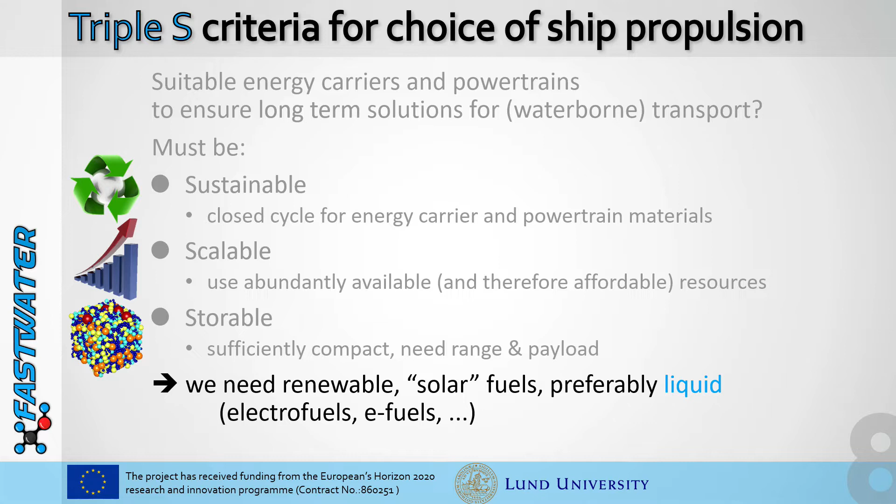If you combine these things and look at what we set out to do within the FASTWATER project, basically we see we have to go for renewable energy in the long run. Green electricity is what we will power a lot of things with. This is sustainable, this is scalable. It's a huge challenge to scale up renewable energy, but we know we have enough of it, so that's a comfort. Then we look at how we can actually make that green electricity manageable.

How can we power heavy transportation with this? We need to look for things with which we can store that power. So we're looking at producing green hydrogen, and capturing CO2, carbon dioxide. These are things that are abundantly available, so that answers the scalability issue.

Once we start building things from these scalable resources, we need to build smart things, and we think that methanol is a very smart choice. It's the simplest hydrogen carrier that is liquid at atmospheric conditions, so that makes it storable. Having a liquid means the number of applications you can tackle with this is much wider.

On the use of methanol, obviously CO2 will be liberated again, but if you start from captured CO2, you set this up in a closed cycle, so you don't emit any net CO2. You don't contribute to any CO2 rise in the atmosphere.

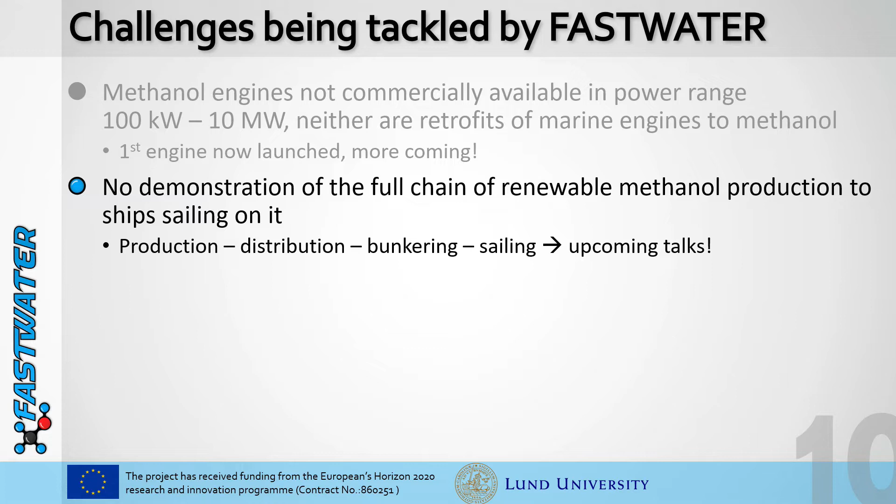A second big challenge was, okay, we need to move away from fossil fuels. Once you start looking into different fuels, it's a whole value chain that you have to start changing, from producing renewable fuel up to actually sailing on this renewable fuel. That's a daunting prospect. We needed to have demonstrators out there. We have managed to do that.

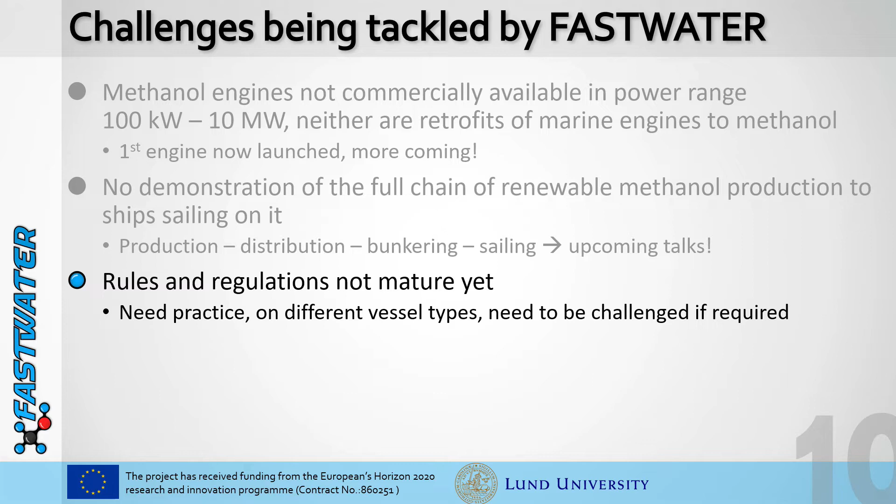Stay tuned for the following talks going into each part of this value chain. Also important, of course, very frequently a hindrance to introducing new things is rules and regulations. There were embryonic rules and regulations a couple of years ago. It was possible to do this, but again, we lacked experience with them. We lacked demonstration on different vessel types to really get this into our fingers - what works, what doesn't work, how should we tackle this?

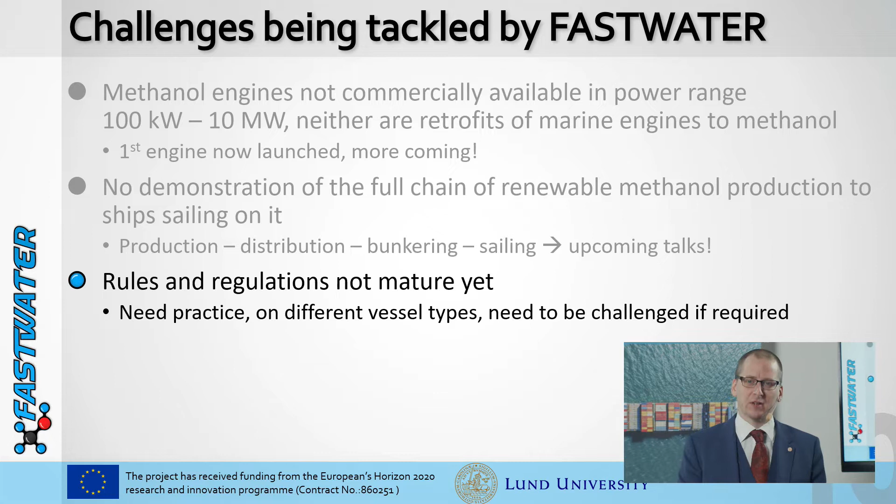So recognizing these challenges led us to submitting this project proposal to the European Commission and then getting it funded. We started about 18 months ago, June 1st, 2020, with a 4-year project with 14 partners that I'll show in a minute.

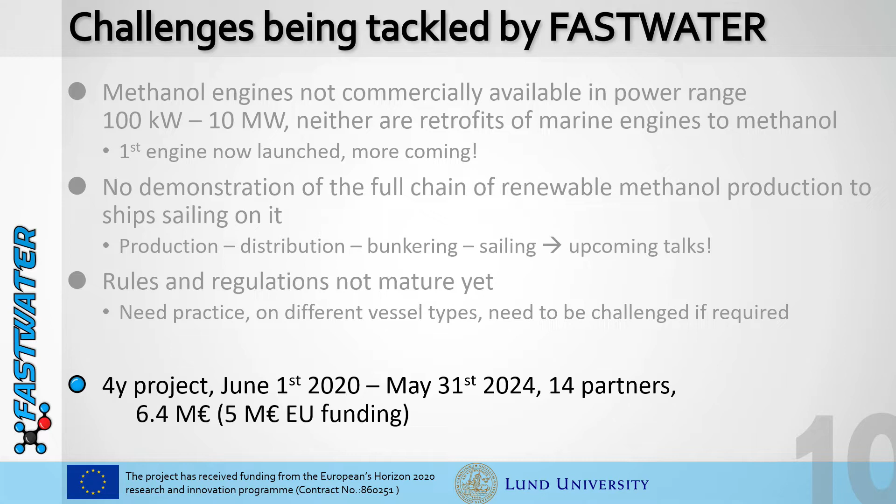What we are doing on a daily basis now is working on engines, working on different methanol engine technologies, working on different power ranges to really make these commercially available. So we have the first product out there already and more coming soon.

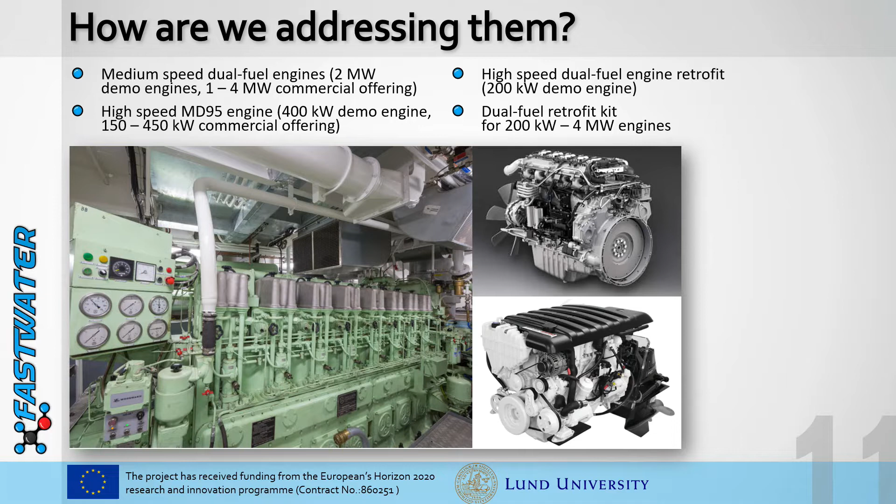But ultimately, these engines, of course, they need to end up in vessels. So within this project, the one you are going to hear about today is the launch of the pilot boat. You're going to look under the hood in a couple of minutes. So that's our first demonstrator ahead of schedule. I'm very happy to report.

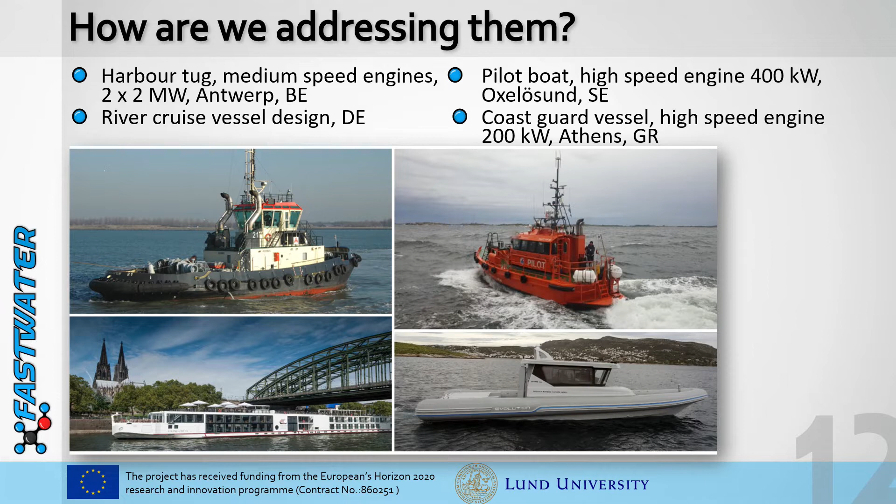So that's a number of partners, of course. Quite a number of pieces of the puzzle have to start lining up to make this happen. So we're spanning quite a number of different partners, from fuel suppliers, ultimately, of course, to vessel owners, such as the Swedish Maritime Administration. Even that is not enough, so we're very happy to have these partners on board.

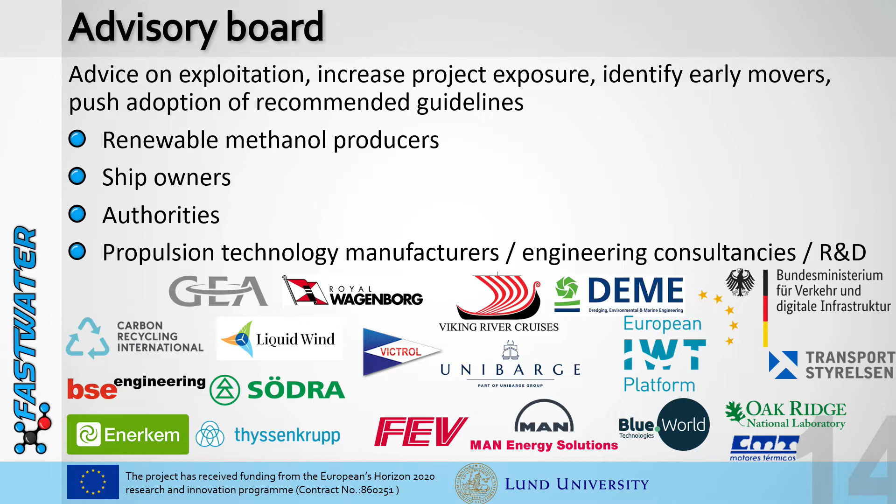But we're equally happy to also have quite a number of partners on board in our advisory boards that help us with advice on how to really make this a reality, how to exploit this, where to identify early movers, to help us out with these guidelines, to tweak them so that this all becomes feasible.

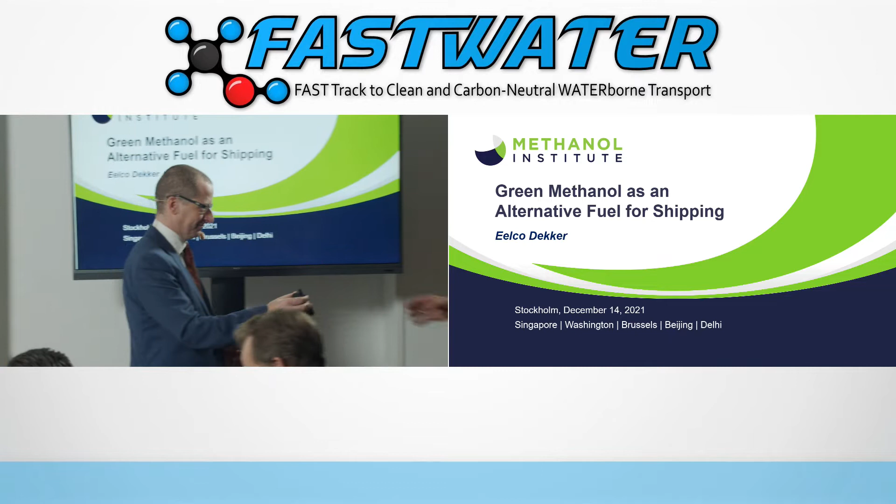On the off chance that you may not have heard of the Methanol Institute, it is a global industry association. We represent the world's largest methanol producers, methanol distributors, technology providers, and increasingly also methanol consumers, especially on the shipping side. Companies like MSC, Oldendorff and Maersk are all members that have joined the Methanol Institute over the last year.

Speaking of use of methanol as a shipping fuel, you only have to open up a shipping magazine or read a maritime website and you see all sorts of articles and headlines about promises of climate neutral, sustainable alternative fuels. What sets apart the different headlines, whether it's the announcement from Maersk of the 8 container vessels or X-Press Feeders with their 16 feeders, the 24 million euro subsidy that the Dutch government has provided for a methanol project with companies like Fugro, Van Oord, Boskalis and many others, is that methanol is not 5 years out. Methanol is happening today. We have approximately 55 methanol-powered vessels on the water today or on order.

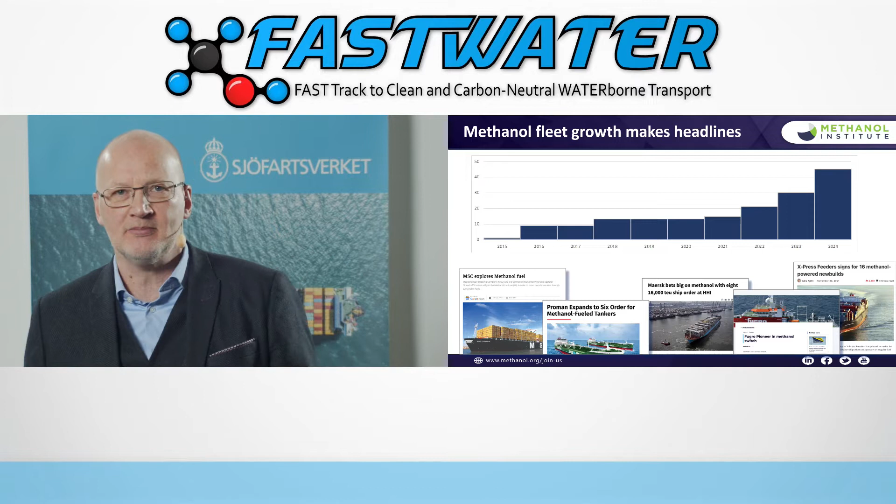There are more vessels on order as we speak, and it's only a limited amount of time before we will see the first 4-stroke engine, and really almost all major engine manufacturers are working on their methanol solutions. But the question is why are people looking at methanol as an alternative fuel? We had 2 speakers from the Swedish Parliament here today.

Policy is an important driver behind what's happening in the shipping industry. And we tend to forget that actually the first driver for the shift to methanol as an alternative fuel was not CO2. It was the introduction of the sulfur emission control areas by IMO. So in 2015, Stena Line introduced the Stena Germanica that operates on methanol in the form of a retrofit.

Since then, CO2 has become much more of a topic in shipping. On the international stage, we have the IMO that is trying to drive the international shipping industry to lower carbon emissions, starting with 40% by 2030 to 50% reduction by 2050.

But you can imagine that if you try and do this on the global stage, it's quite challenging, because where Western member states, Western countries and Western stakeholders feel that IMO is not moving fast enough, we have other parts of the world that are saying, well, hang on, we're going too fast. They can't even agree on the definition of what it means to reduce carbon. Are we talking about tank to wake, or are we talking well to wake?

So it's still a very complicated discussion. And so despite all the optimism at COP26, I'm afraid that it will still take IMO quite a long time to come to an agreement.

And then on the other side, we have the European Union. The European Union introduced the Fit for 55 package in June this year, which has implications for a lot of different industries, for a lot of different energy carriers. And in that package, there are two specific pieces of legislation that have a very big impact on the shipping industry. On the one hand, Europe aims to introduce the emission trading scheme for shipping as well, meaning that gradually, as a shipping company, you have to start paying when you're emitting carbon.

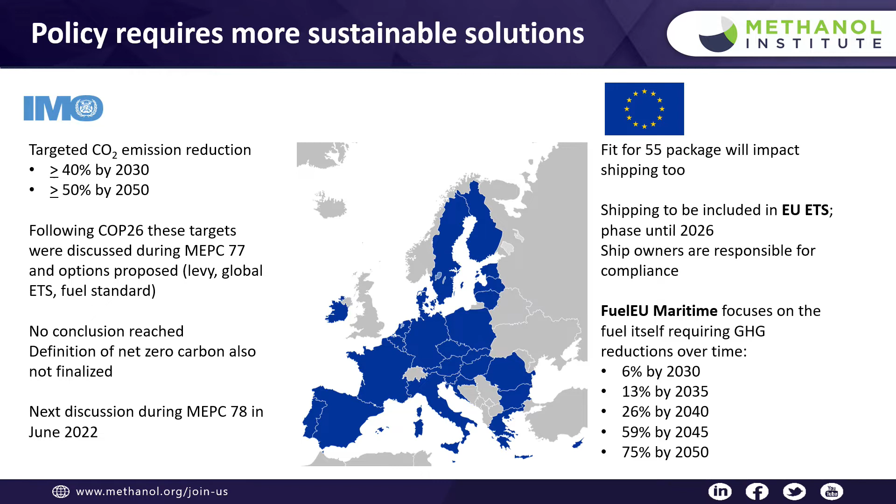And at the same time, Europe also has introduced the FuelEU Maritime regulation, which is looking at the fuel standard. And similar to what the Fuel Quality Directive did for road fuels, the FuelEU Maritime regulation is looking to reduce the actual carbon footprint of marine fuels.

So where does methanol come into that picture? Now, as I briefly touched upon, methanol, whether it's fossil methanol or renewable methanol, has an immediate benefit when it comes to reducing local air emissions. It can also drive CO2 emissions down, especially when you start producing renewable methanol.

And the question we get asked often is, how much renewable methanol is available? When will it be available? And in order to answer that question, we first need to look at how we actually produce renewable methanol. I'm not an engineer, I'm not a chemist, so I've definitely oversimplified things here. But really you can bracket the production of renewable methanol into 4 different buckets.

Today, most of the methanol produced worldwide is made from natural gas. If I switch over from natural gas to biogas, I don't actually have to change anything to my methanol production process, but I can start producing biomethanol. Another way of producing biomethanol is by gasification of either biomass or municipal solid waste, which gives you a syngas, which is then easily reacted into methanol.

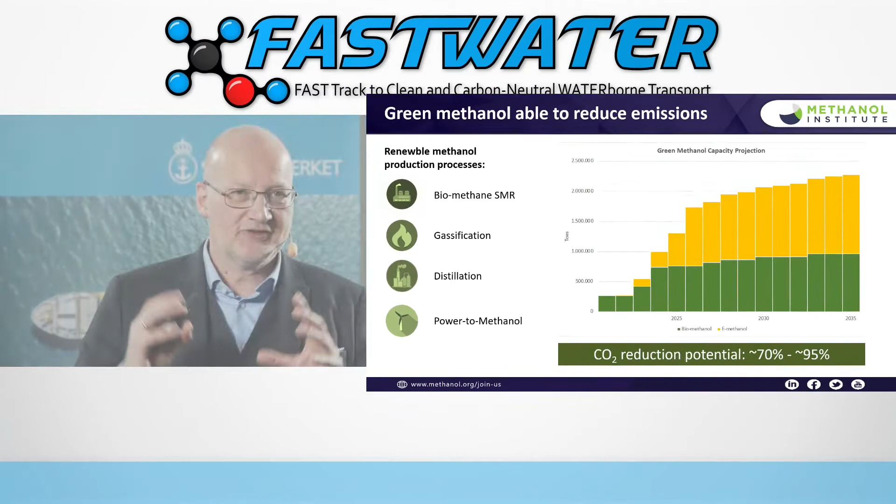Now, the next speaker after me is from Södra, and he will talk in much more detail about the specific process, which I have simplified by calling it distillation. I know that's not completely doing it justice, but we'll hear more about that.

And then the last pathway that was also briefly touched upon by Sebastian Verhelst is the production of so-called e-methanol, or in legislative terms it's called renewable fuels of non-biological origin, which means as much that we take renewable electricity, convert the electricity into hydrogen, and then react the hydrogen with carbon dioxide to produce methanol.

And in the chart that I'm showing on the slides here, I have tried to summarize what we have seen in terms of various announcements of different projects. And roughly we see projects equating to an order of magnitude of about 2 million metric tons of renewable methanol in the next 10 years or so.

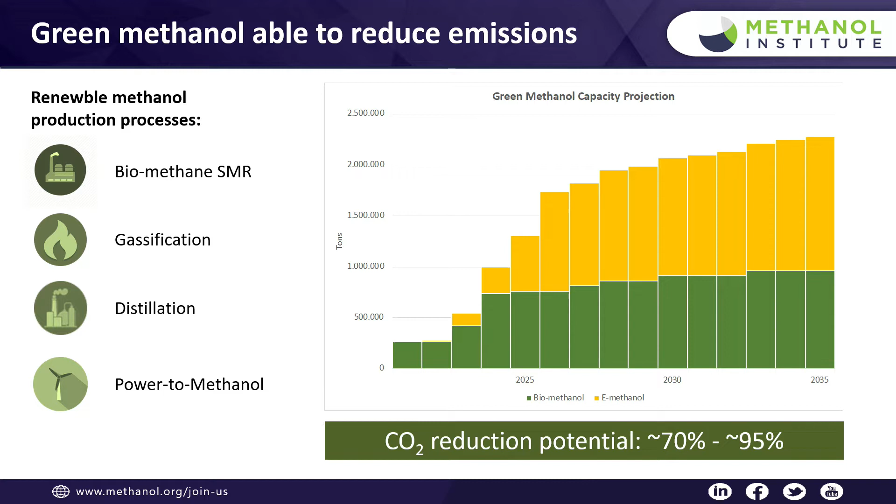Probably some of those projects will not come to fruition, but then again, every other week there's an announcement about a new project. So we're quite optimistic about where this will be headed. But the future will only tell, and it's really a question between supply and demand.

It's chicken and the egg discussion as usual.

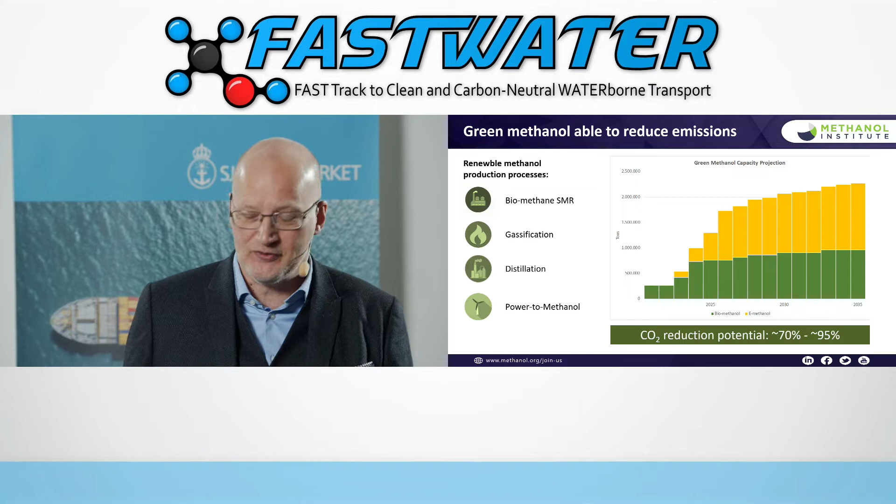So to summarize, why methanol? Methanol is liquid at atmospheric pressure, and it's available in most major ports around the world.

It results in immediate lower emissions, so better local air quality, but it also has the potential to reduce carbon dioxide. And something that is often neglected in these discussions: methanol is biodegradable. So you shouldn't have a spill, but when you do, methanol actually causes very few problems.

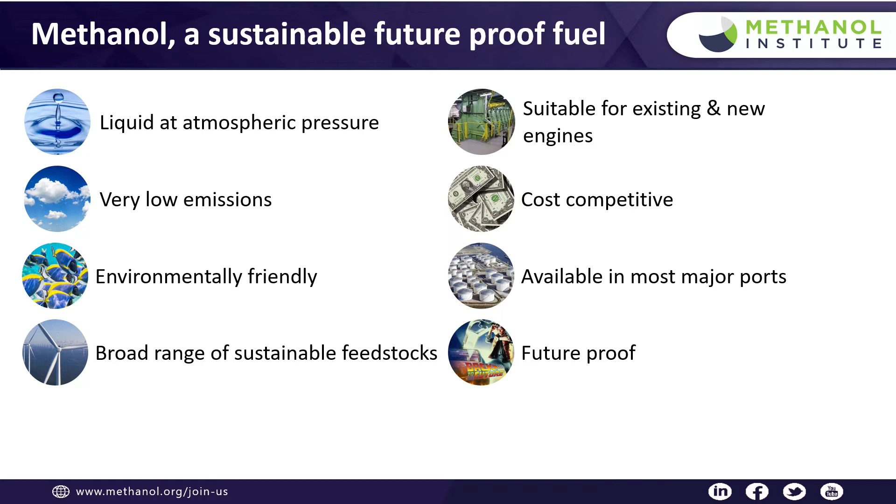Methanol can also be made from a wide range of renewable feedstocks. It can be cost effective, and when you look at the various studies on the transition to alternative fuels, methanol is one of the lowest cost solutions when it comes to total cost of ownership.

So really, methanol is a future-proof fuel, but it's a future-proof fuel which is available already today, and it's here to stay.

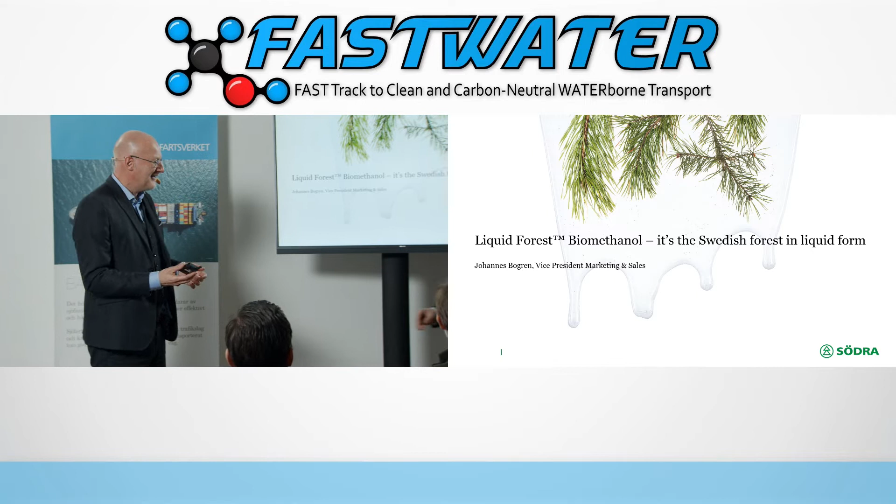Thank you, Elko, for the introduction. Great to be here and talk to you about our product that we call liquid forest biomethanol. And we call it liquid forest because it's simply the Swedish forest in liquefied form.

First, a few words about Södra, the company that I represent. We are a Swedish forest industry group, owned by 52,000 forest owners in the southern part of Sweden. Our task as a company is really to create value out of this versatile raw material.

We do this by creating different kinds of forest-based products. We operate sawmills that produce products used for construction and building houses. We operate pulp mills that make paper pulp, used in different paper products like tissue, office paper, packaging, all kinds of products. And at one mill, we produce something called textile pulp that is used to make textiles.

Over the past decade, we've worked a lot on our operations to be resource efficient and energy efficient. This has allowed us to start selling green electricity out on the grid. We also supply different kinds of co-products from the mills, and we'll talk more about one of those today: our biomethanol.

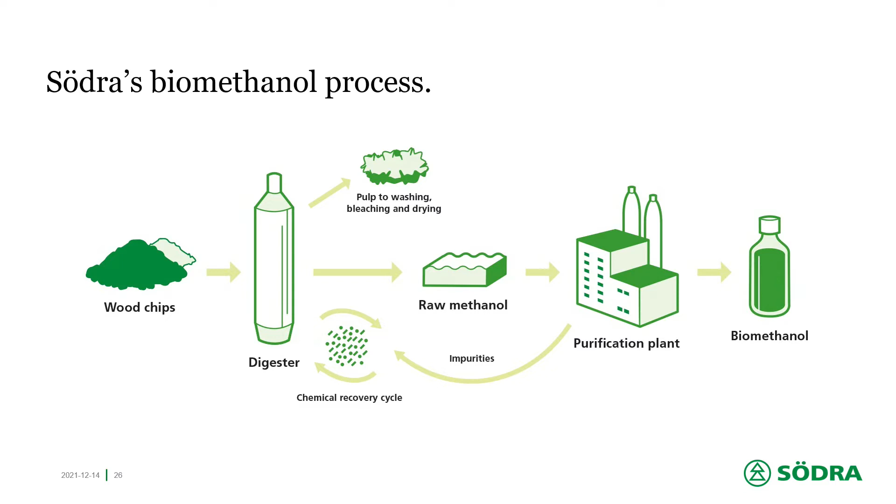During this operation, biomethanol is also formed together with all kinds of other volatile compounds. This mixture we call raw methanol, because it's composed of different things, and it's really stinky. What we need to do is purify this stream — we remove all the other components, and what's left is our methanol that we can then sell into the market. So that's a simple explanation of how this works.

Sounds easy, but it's not. It has taken us many, many years to develop this.

Just to give you an idea about the journey we've been on, we started this project roughly 10 years ago with the first idea of how we could supply the next generation of biofuels. A year later we had to construct a special lab because the product is so stinky, and we did it at one of our mills in Mörrum with promising results. Two years later we moved on with a pilot plant, and a couple of years later we saw that this is commercially viable. We moved ahead with a pre-project to see how we could construct this, and in 2017 our board took a decision to move on with the commercial plant. Just the day after, the procurement and construction phase started.

During fall 2019 we fired up the plant, and it was really a bumpy start, I must say. Sometimes you had 2 steps ahead, 1 back, sometimes 3 back. You know how it is. This is really tricky.

But roughly a year ago, during autumn 2020, we had an inauguration with the Minister of Enterprise, Ibrahim Baylan, who pushed the button. Since then the mill has been working really, really well. We are now up at design capacity, and we are selling this product regularly out in the market. I was really pleased now also with the pilot boat here being bunkered with our methanol.

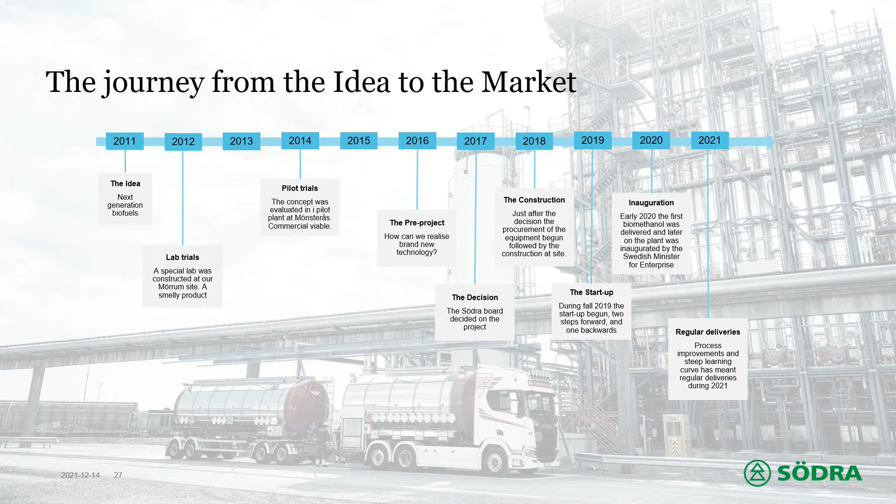The application, let me put it like this: the methanol market is huge, 100 million tons plus. The biomethanol market is really a niche market. We try to find those that value a product based on the forest. Today we sell it into applications like pharma, the flavor and fragrance industry, and of course the biofuel market, which is the big one.

There's a huge difference, of course, compared to our volume and the total market volume for methanol. But this kind of technology is possible for all kinds of pulp mills all over the world. If we look at that potential, we're talking about 2 to 3 million tons of biomethanol that might be produced from these pulp mills - a really resource efficient way.

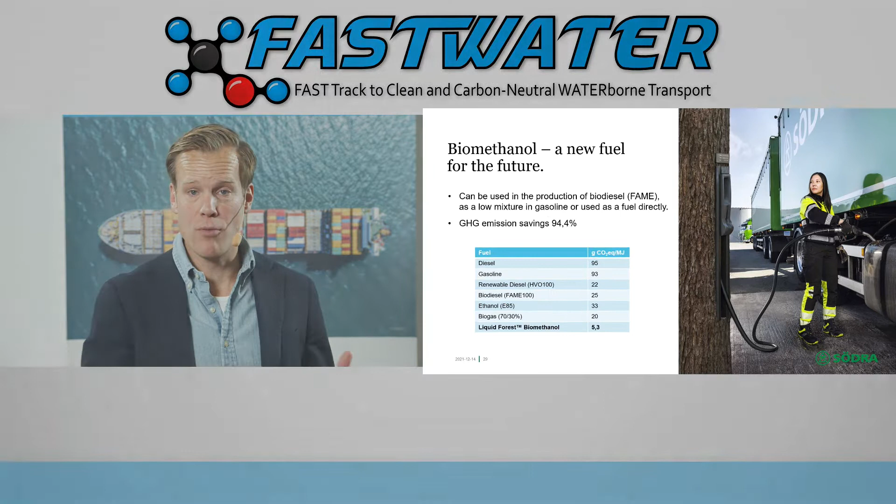Talking about biomethanol as a fuel for the future, there are different ways of using it. Our biggest customer today produces biodiesel according to the FAME process - that's one way of using methanol. Another way is to use it as a low mixture into the gasoline pool. Or, as we're learning today, use it as a fuel directly.

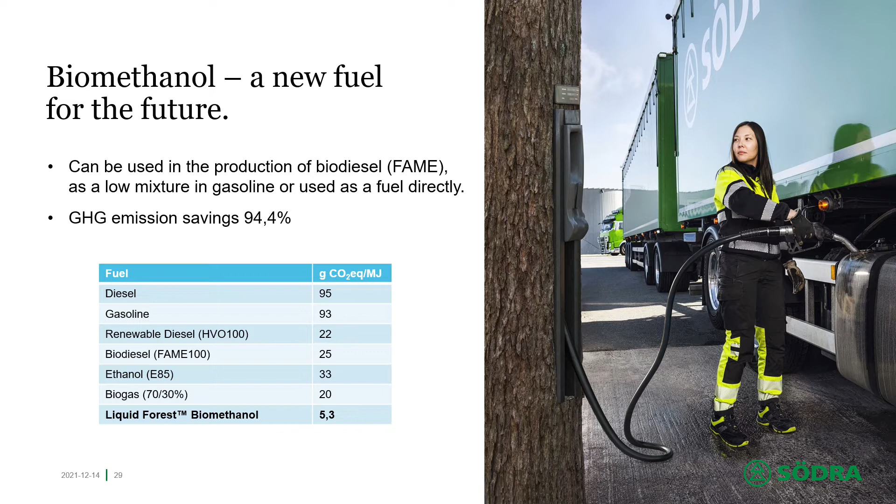And if you use it as a fuel directly, you save a huge amount of greenhouse gas emissions - with our numbers, 94.4% that you save. If you compare it to other renewable fuels that also emit carbon dioxide, you see that HVO, FAME, or ethanol emit 5 to 6 times more carbon dioxide than biomethanol. Biomethanol is really a very good example of how you can work resource efficiently.

So I'm really happy to be here today with this new chapter for biomethanol being used as a fuel directly, and I'd like to congratulate everyone involved with this pilot boat conversion. I think this is a great way to show how we can all cooperate together and save greenhouse gas emissions. And with that, I'd like to end by reminding everyone that the future is made of trees.

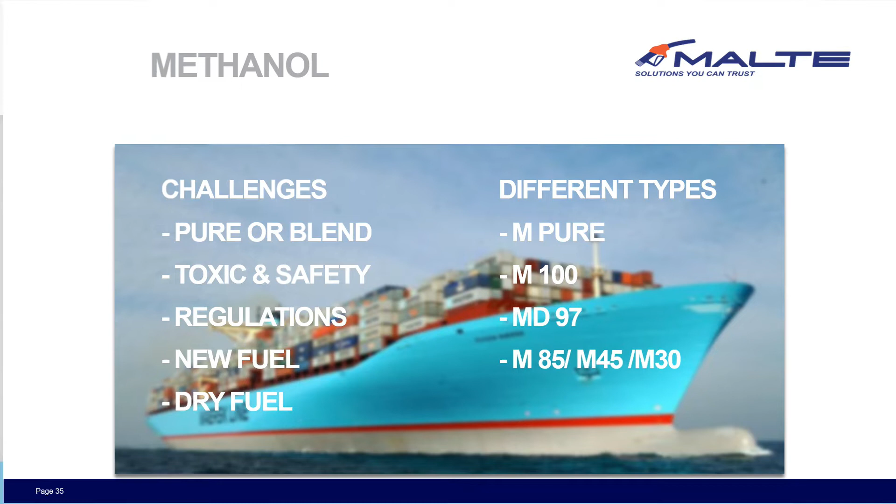Then of course everybody's talking about toxic - what is toxic for what? Is it toxic for human beings, living animals, nature, water? If it's toxic in one situation, it's not necessarily toxic in general. So it's important to understand the need and how dangerous something is. If petrol had come today as a fuel, it would have been sold by prescription in the pharmacy. So it's a way to understand - the society needs to be educated and trained for it.

Another thing I will address, especially to the politicians here, is that we have a mission with regulation - especially in some European countries - around fire class 1 product integration in the industry, which normally works with diesel or marine gas oil. That's the mission: to understand the safety aspect and take care of it, handled properly.

So with a new fuel in combination with that - when we have 170 boats or something like that, some will have a new fuel that really needs a training session, so all staff understand how to handle it. And of course, methanol is very dry, so lubricants are also needed.

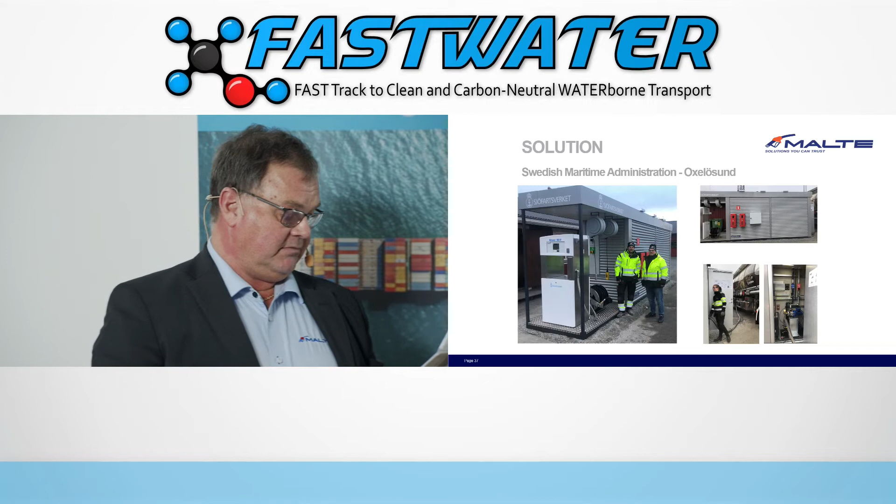We have approval for all fire rules and safety rules in Sweden, but we've done a construction here fulfilling the ATEX rules for Europe. The secondary containment, leak detection, blending, and special requests from the owner about how the process should be handled to the boat, safety distance to the sea, drip-free connections - and then, of course, I take the opportunity to include some company identity and profile on it so we can see who the owner is.

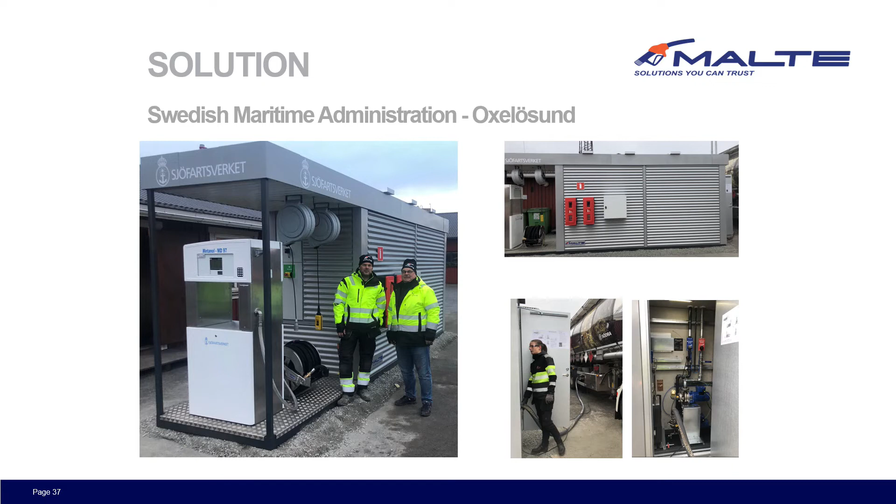It's always difficult to sell a fuel which is flammable, with no packaging, hazardous, with safety aspects. Therefore, corporate identity is important to show what we really would like to have.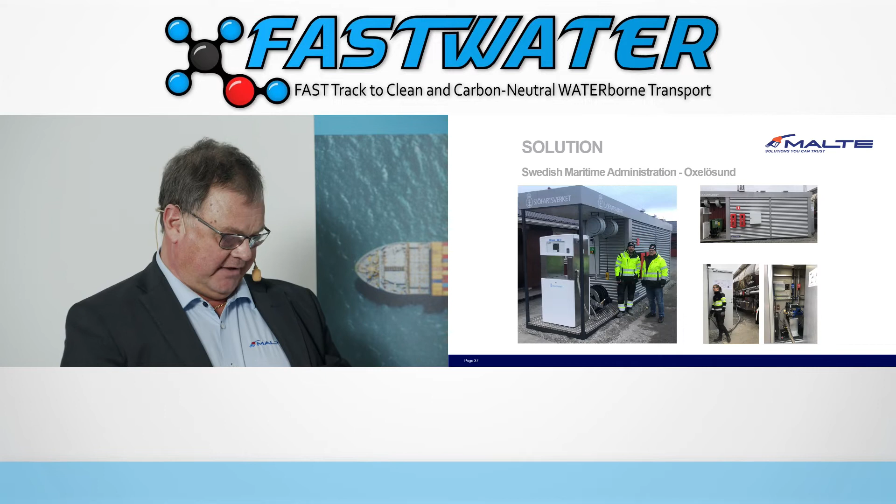I would also like to thank you. It has been a fantastic opportunity for us to increase our knowledge to handle new types of fuels for Sjöfartsverket and this MD97.

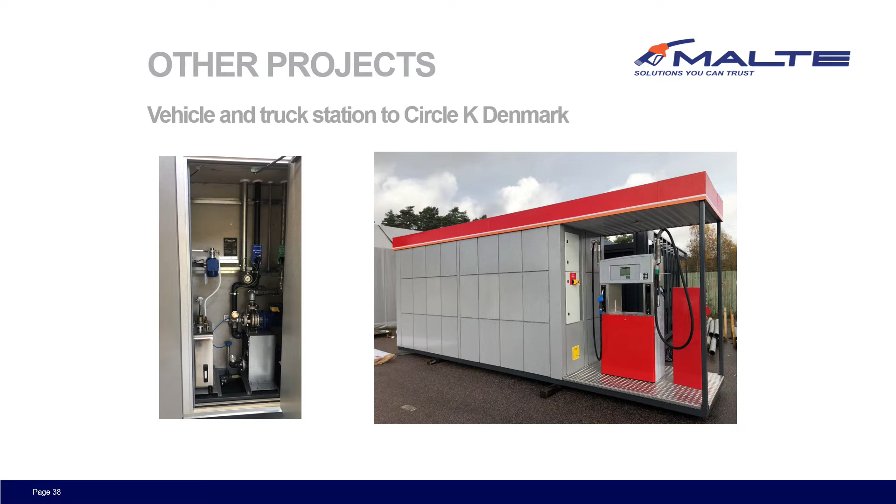But I must take the opportunity to give you some brief information on what we are doing more in the methanol area. Denmark, our neighbor country, has decided to go for 90% exchange of petrol to methanol by 2034, very soon. They are producing 3 types of units for blending M100 into petrol, but also M100 for lubricants for spark ignition engines. So different applications need different types of engines, and different mixtures of products.

So we can see here very soon that MD97, M100 with lubricants, M-Pure and M85 will be the new fuels on the market for many years ahead. In Denmark, we will see Power-to-X, electrolyzed water merged with green carbon dioxide. That will mean more or less no limitation of availability. It will be a fantastic possibility.

I'm representing a very small company here, but when companies like Maersk, Ørsted, and Sjöfartsverket understand what is the future, this will really be a possibility.

But Sweden can't do it by themselves. We have a fantastic pilot project here, we're going ahead, but to be a success story, it must also be introduced in other European countries, like Germany, Netherlands, Austria, and Poland.

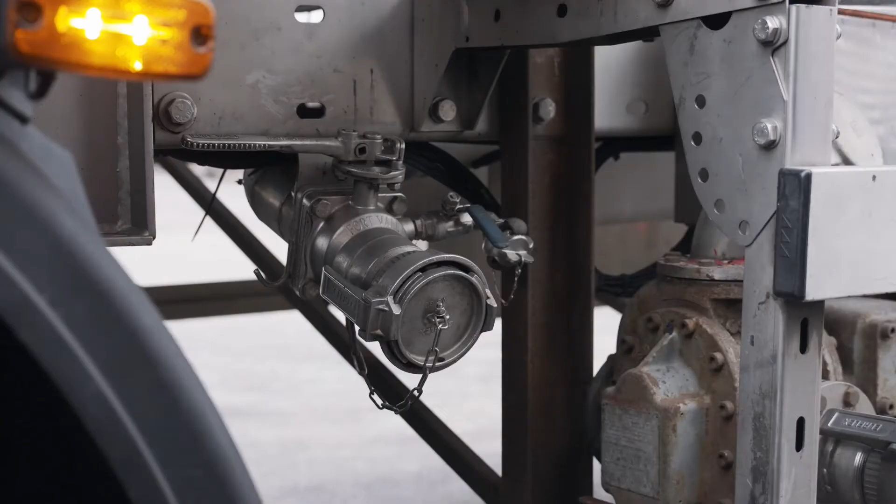You can see it being transported in a road tanker, methanol from Södra, the green plant-based methanol, renewable methanol, arriving at the Oxelösund pilot boat station, using procedures in place for road transport of methanol and other flammable liquids, regulated and a common procedure today.

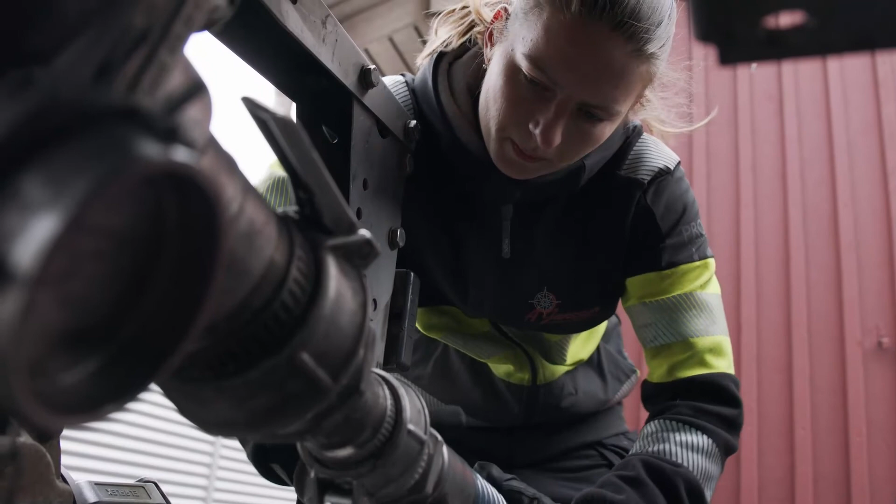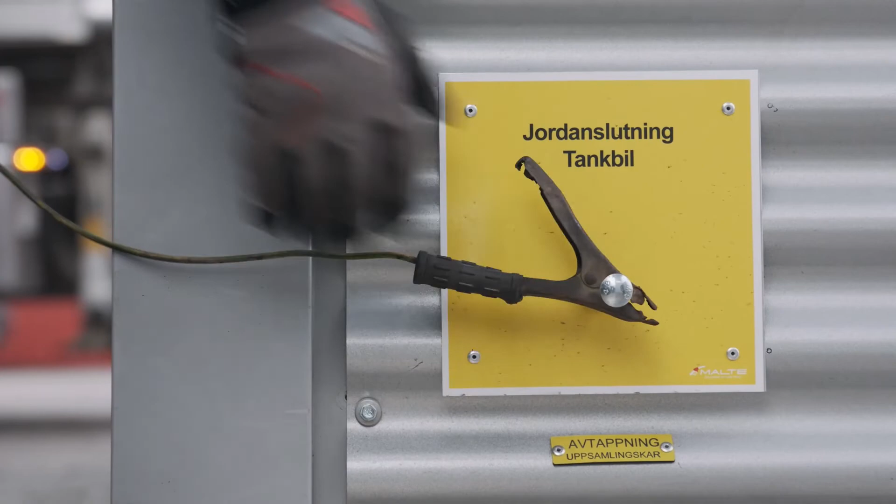Connecting the pilot boat methanol station, constructed by Malte, to the truck to transfer the methanol, following the required safety procedures. You can see here, for example, grounding the truck to the bunker station to ensure there's no electrostatic charge buildup, which is important for the transfer as well.

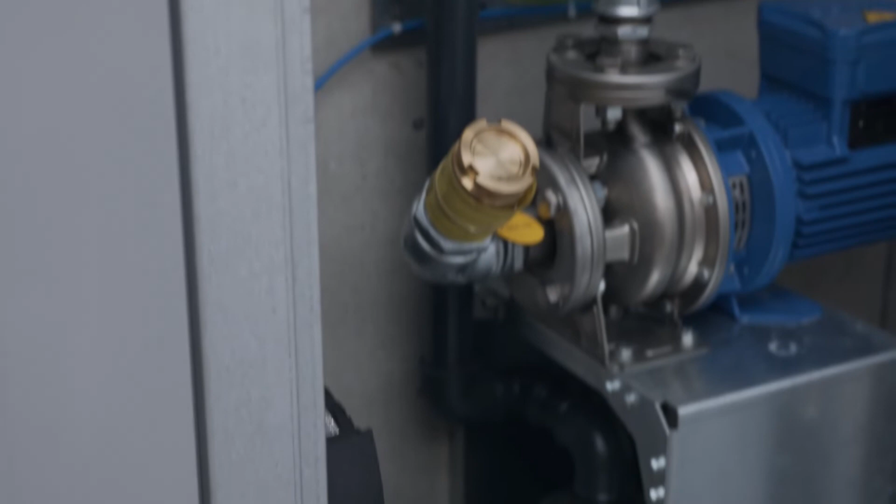Another safety feature is the hose connection is a drip-free connection, to ensure when disconnecting after bunkering there will be no spill, even of a small amount of methanol.

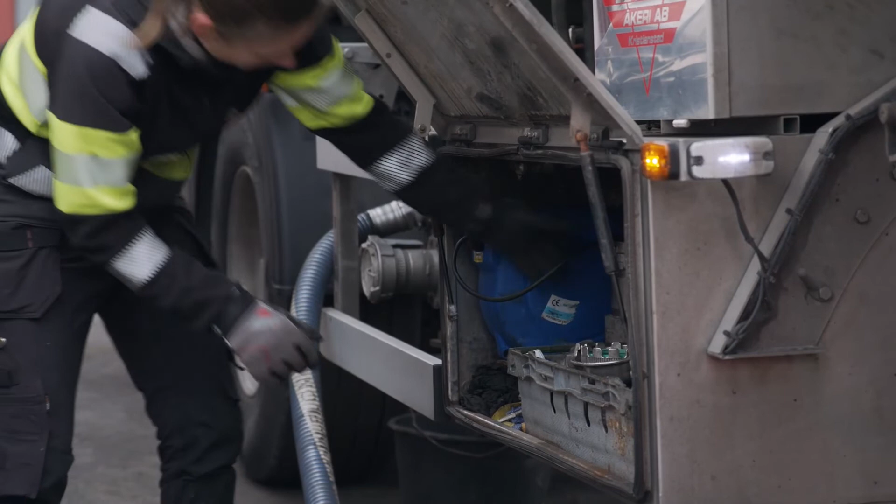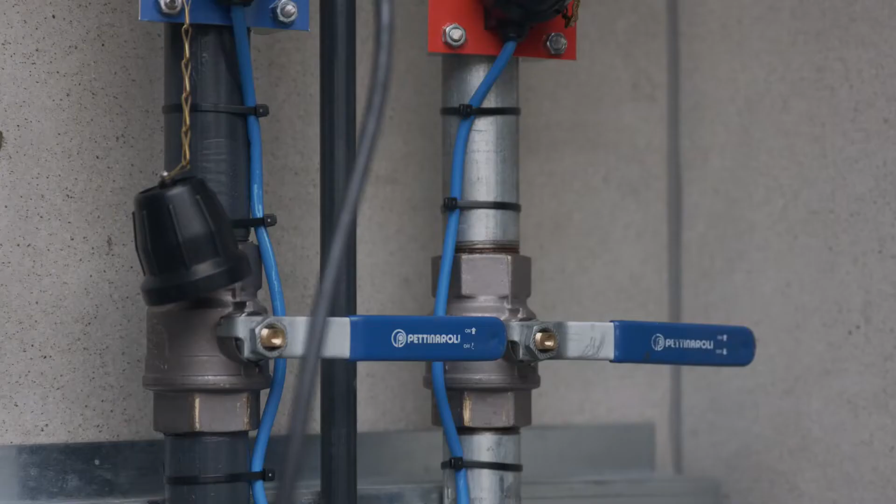Also important from a safety perspective and required is that the tank level gauge is connected to the truck, so when the maximum level is reached, there's an automatic shut-off, preventing any sort of overfill problems.

Required safety equipment, of course, goggles and gloves, required for the purpose of handling methanol and starting up the transfer procedure.

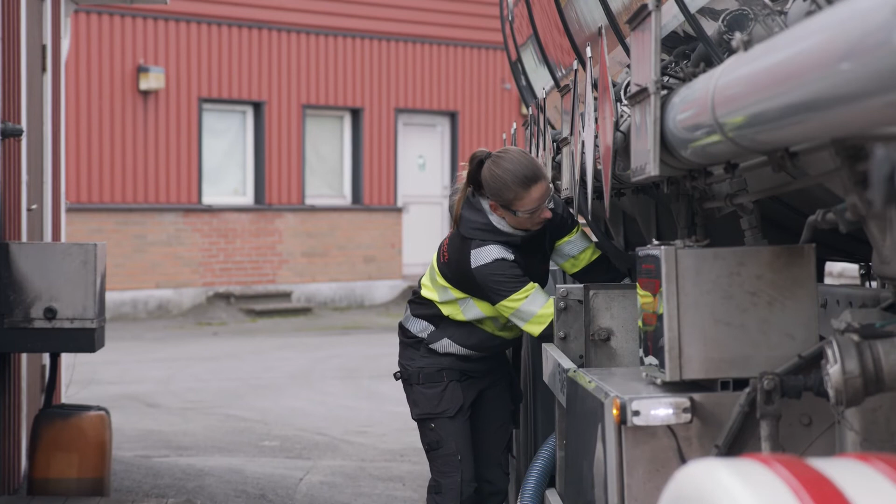The pump is integral to the bunker station, so the pump starts here, transferring the methanol into the station, the M97 methanol station, where before it's loaded to the pilot boat, the methanol will be blended with additives.

And here as well, the connection to the pilot boat is also of the drip-free type, to ensure again no loss of methanol after disconnecting. You see the connection here to the pilot boat bunker pipe.

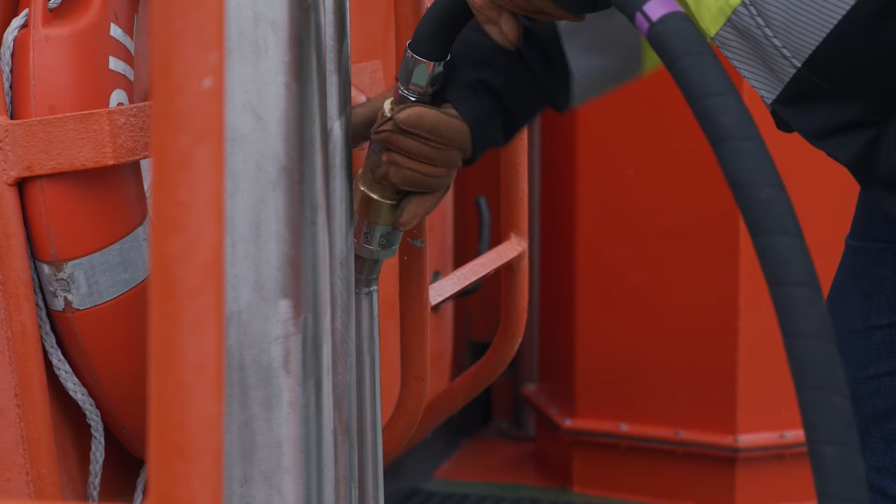There is also a tank level gauge on the pilot boat that is connected to the pumps, to ensure that as soon as the maximum level is reached, there will be an automatic shut-off of the pump and no risk of overfilling.

For starting and stopping the methanol transfer, there is a handheld device that must be depressed, and as soon as it's released, the transfer will stop. Another safety feature.

Ensuring the ability to stand in location and observe both the transfer of the methanol and the station. It's finished, and off goes the pilot boat.

What we're going to hear next, two speakers talk about how the engine conversion work has been developed for the pilot boat, and how the ship conversion has been done. Thank you very much, and I'm happy to have the opportunity to introduce Mr. Albert Byström of the Swedish Maritime Administration, who has worked so hard and been instrumental in this pilot boat project. Thank you.

Thank you very much. My name is Albert Byström, from Swedish Maritime Administration, and I will host this presentation along with Patrik Molander from ScandiNAOS. We'll start off talking a bit about what a pilot boat is.

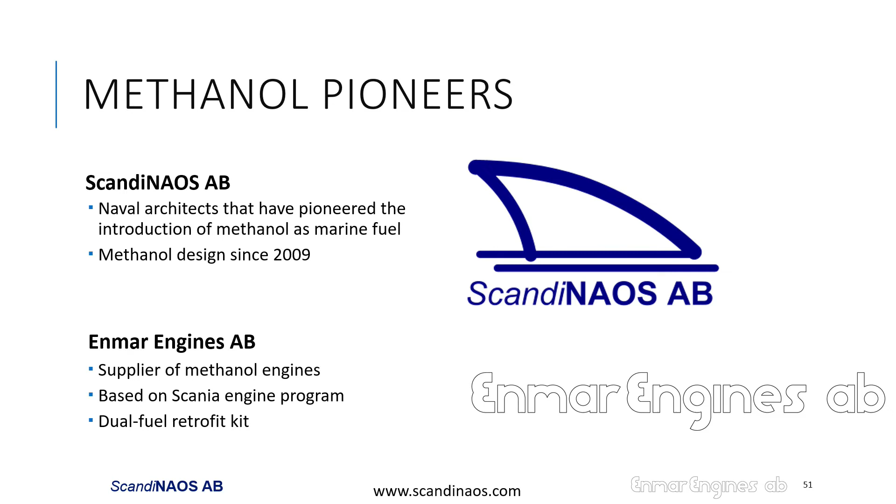Our company ScandiNAOS started in 2005. We have been into methanol design since 2009. We like to call ourselves methanol pioneers, and there's some substance in that saying, because we have actually taken part in a lot of methanol conversions and methanol design projects over the last 12 years now. All the way from large RoPax ships to pre-studies, smaller boats, and now also pilot boats. We've been involved in many real projects, so real conversion designs.

We started a sister company, Enmar Engines, that will only focus on methanol engine production. Within ScandiNAOS, we have developed methanol engines for 5 years now, and we have seen that there is a huge request on the market for this size of engines. So that is the background for that.

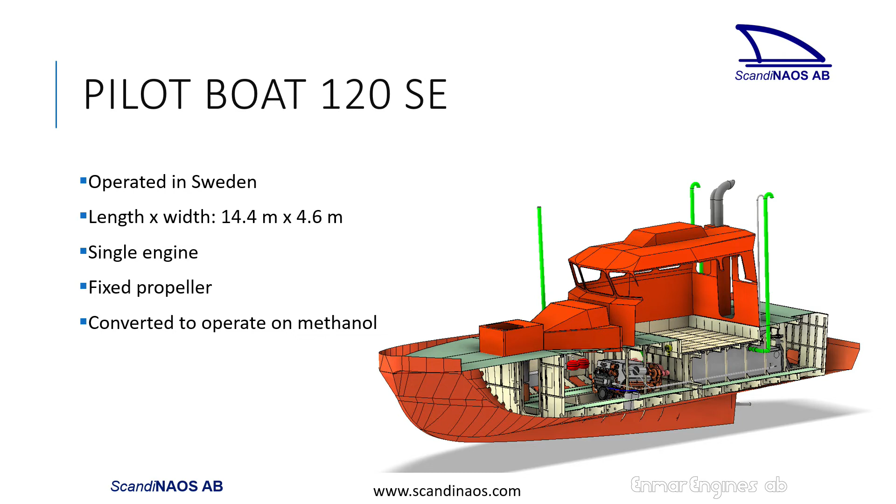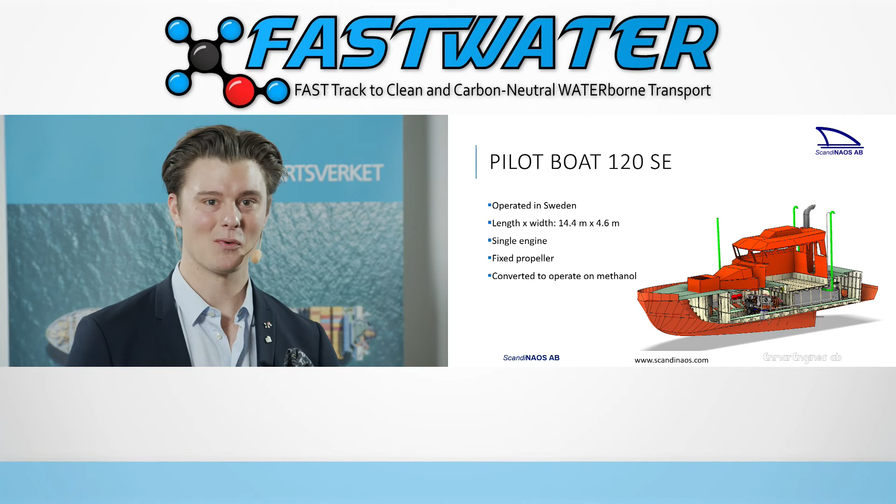I will tell you very briefly about why we should use methanol as a fuel, why it's good for us, and then you have to allow me to become a bit more technical in my presentation. I hope you appreciate it.

So why should we use methanol? Methanol is a clean burning alcohol. There's no sulfur in the fuel, and if you don't have sulfur in the fuel, you will not have sulfur oxides formed in the combustion. Sulfur oxide is in some cases recognized as SOx. So this boat, using methanol, will not lead to any SOx emissions.

Methanol is a simple alcohol, and when combusting methanol, no particles are formed. It's actually physically not possible for methanol to form particles or soot, which are other words for long carbon chains. This is not possible, so we will not have any particulate matter formed from this type of engines.

Methanol also reduces the emissions of NOx, nitrogen oxides. Nitrogen is not part of the fuel, but it's part of the air that goes into the engine, and in the combustion, in the chemical reaction, NOx is formed. Since methanol burns cool, it has a cold combustion, we will have reduced emissions of NOx.

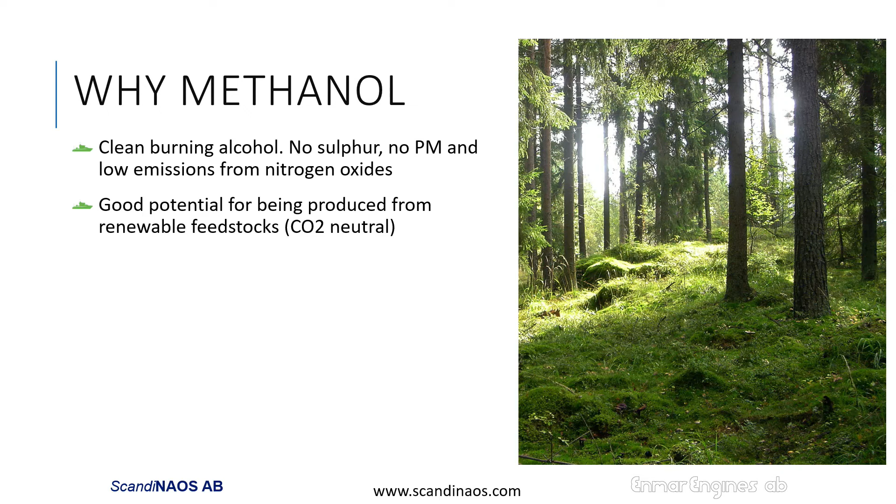As my previous speakers told us, methanol has a very good potential for being produced from renewable feedstocks, both as biomethanol but also as e-methanol, which is produced from renewable electricity.

Methanol is biodegradable and does not bioaccumulate in aquatic environments, so we shouldn't have a spill, but if we have, especially in a marine or marine sensitive environment, it's highly important that we do not cause any environmental problems.

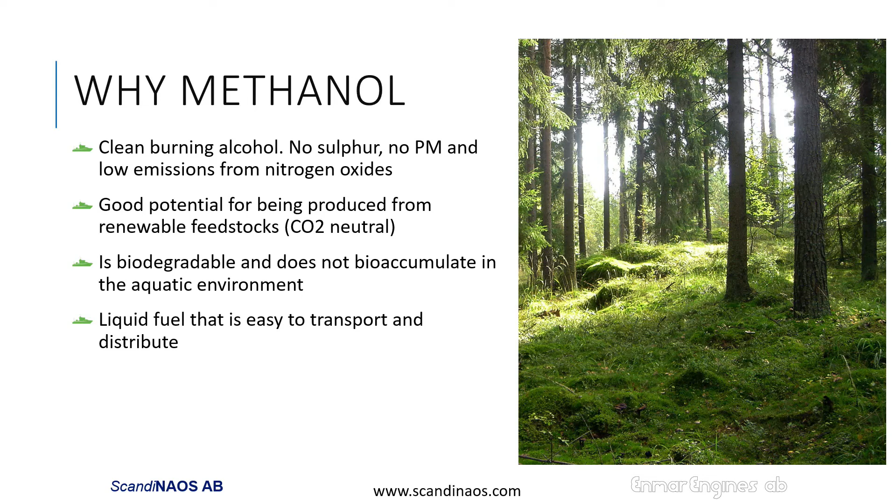It's a liquid fuel that is easy to transport and distribute. From a logistic and transport point of view, we can always discuss different technologies for how to transport it and the challenges, and that's an important fact to cover here. But liquid methanol is more like diesel to transport than transporting a gas, for instance cryogenic gas or compressed gas. So it is, after all, a quite simple liquid to transport.

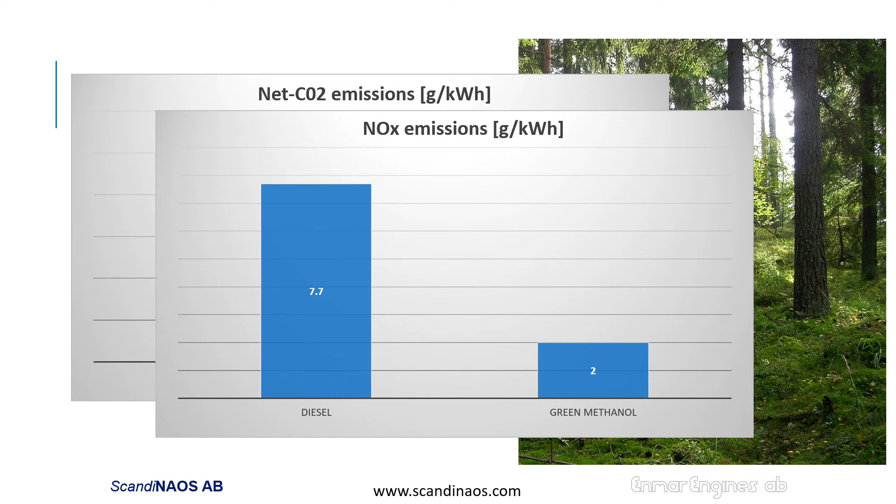The ship pilot boat 120 SE is a conversion of an existing vessel. There used to be an IMO Tier 2 engine installed on board, where the emission of NOx is 7.7 grams per kilowatt hour. Producing the same power, we reduced this to 2 grams for the engine that is installed now.

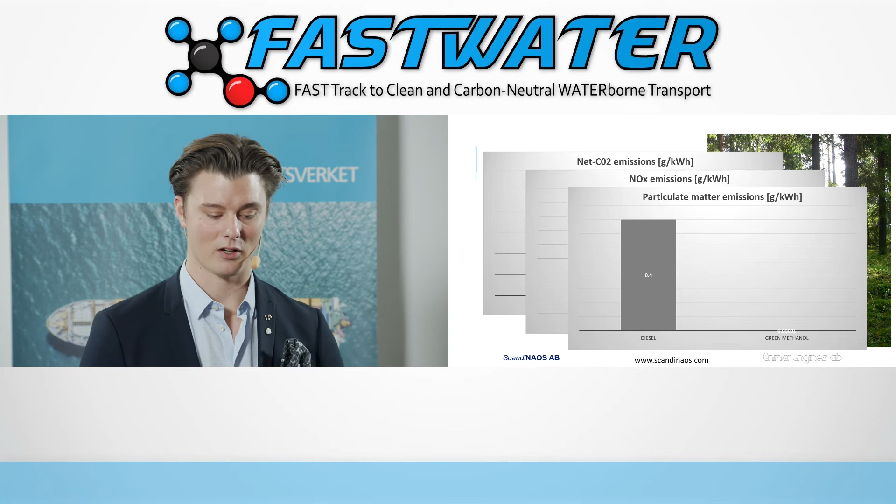Particulate matters are not formed in the combustion of methanol, so this is reduced to zero. A typical example is the previous engine that was installed on board a pilot boat, where the emission is

0.4 grams per kilowatt hour. I will go through some design challenges of a methanol ship. Methanol has different properties than diesel. It's not in all cases a worse or more difficult liquid to handle, but we have a standard level of how to handle and how to make a diesel installation, how to handle the diesel fuel on board. Methanol has different properties, and some of the challenges we need to cover is that it's a low flash point fuel.

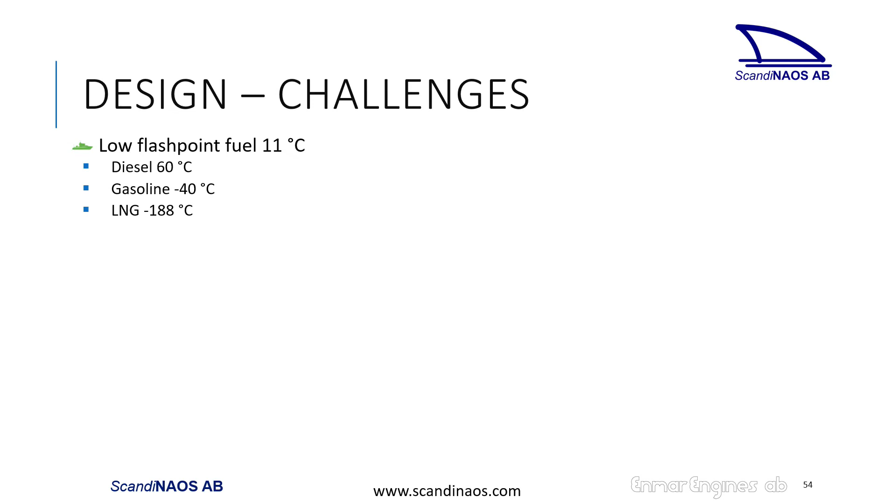The flash point of a fuel is easiest described by having methanol or any fuel in a pool. So if we imagine we have a spillage or a pool of methanol in front of us, and we have a certain environmental or surrounding temperature, in this case 11 degrees for methanol, the vapor produced from this pool is enough to create a flammable atmosphere. And if we have an ignition, we could have a fire, or we will have a fire. The same goes for diesel, but here the temperature is 60 degrees. Gasoline requires a temperature of -40, and LNG -188. Since 11 degrees Celsius is a quite normal temperature on board a ship in our environment, we need to find a design to handle this challenge.

Methanol flame is almost invisible in daylight, so we need to find another way of detecting a methanol fire than the traditional way. The reason methanol is more difficult to see in daylight is that it doesn't produce any soot. So the fire from a diesel or gasoline fire has this intense orange-yellow color, while methanol is more of a blue flame.

On the other hand, we have some benefits for fire suppression. Methanol has less heat radiation than a corresponding diesel or gasoline fire. So if we have a fire, the heat radiated from the methanol fuel is lower. You can stand very close to a methanol fire without hurting yourself from burn heat injuries. It's also possible to extinguish the fire using water.

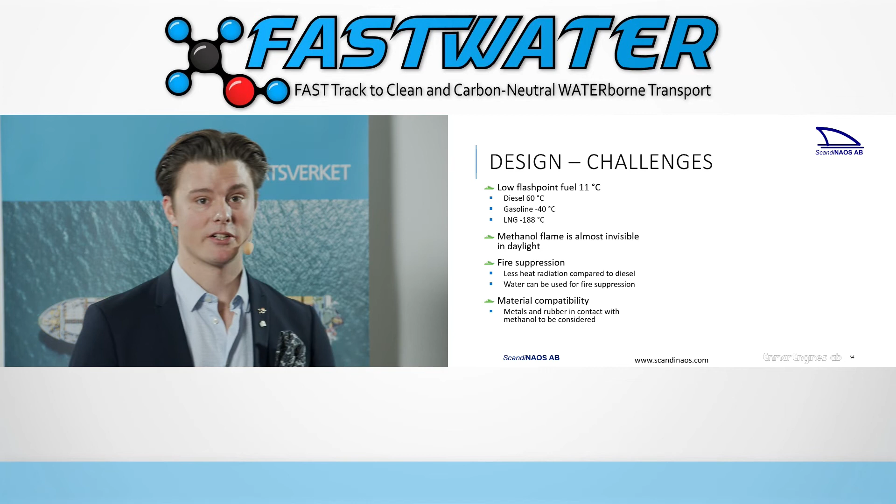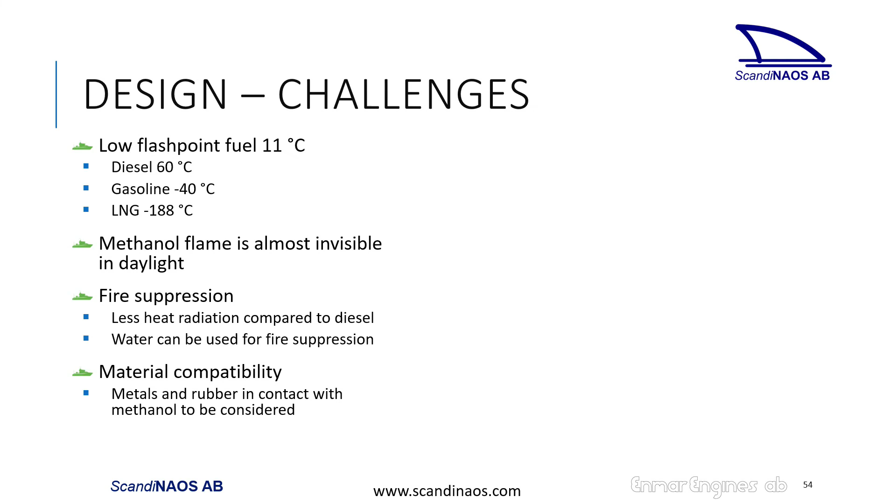We have some challenges with material compatibility, in terms of metal and rubber in contact with fuel, which in most cases needs to be evaluated all the way from the tank through the fuel lines and also in the engine. We need to be aware of all the materials the methanol is in contact with. It's not worse than diesel, but other materials and other rubbers, other metals need to be considered, so it needs to be evaluated all the way.

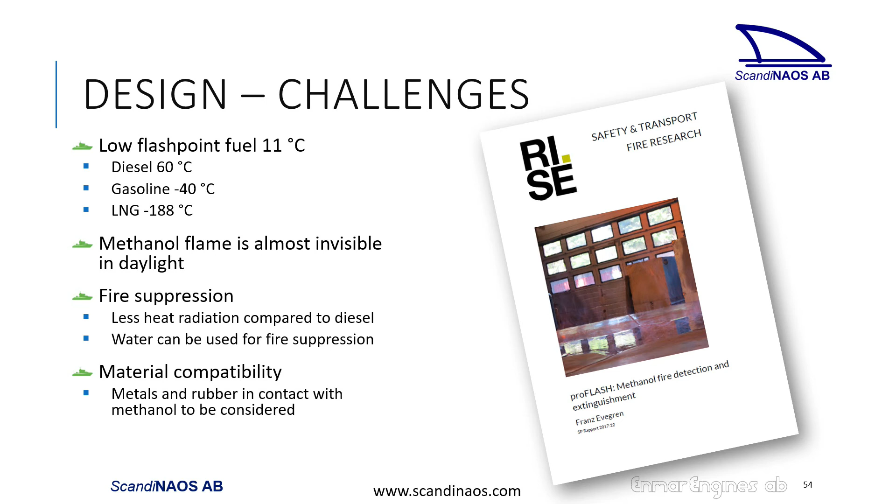Luckily we have some experience from previous projects. We have a research institute of Sweden, RISE, who's been evaluating methanol fires and how to handle fire and leakages, and we also have extensive, quite rigid experience from previous projects, both in my company, ScandiNAOS, but also in other companies and organizations for how to handle this type of challenge.

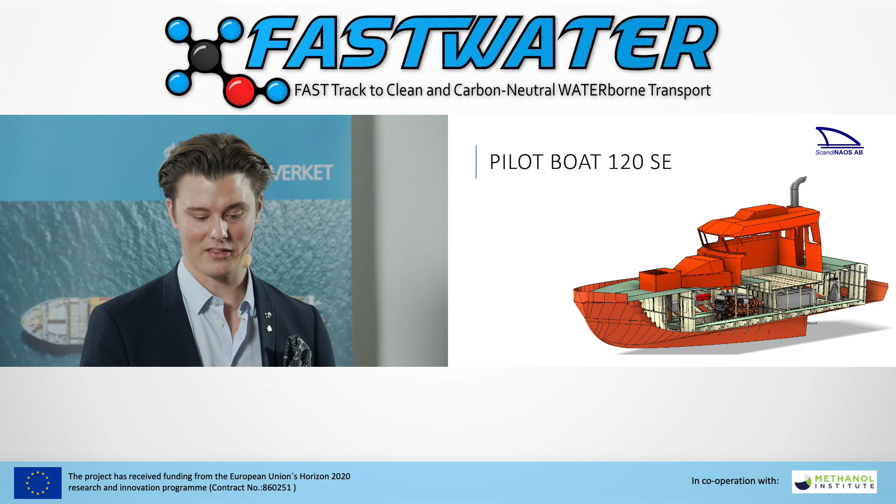This is the pilot boat before it was converted to methanol, and I will show you the next slide, which shows the full conversion. So I will go back again, and then we'll go forward again, so you can see that some components are added in the design, and I will go through them.

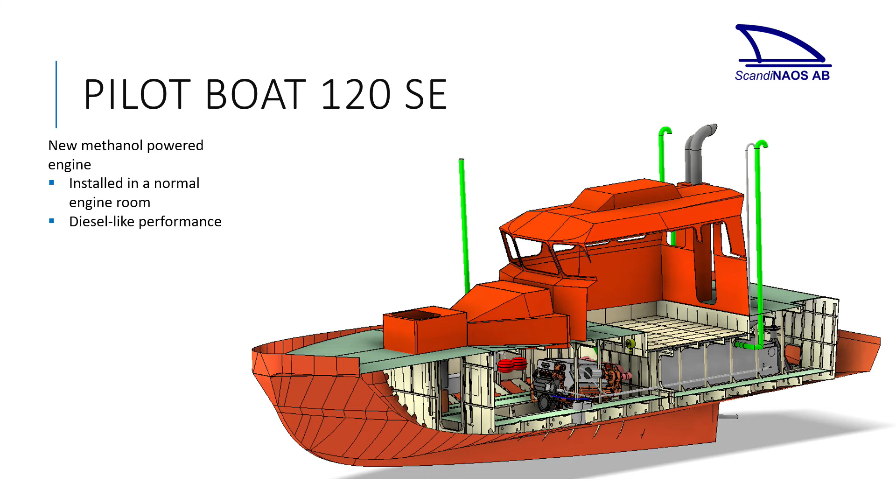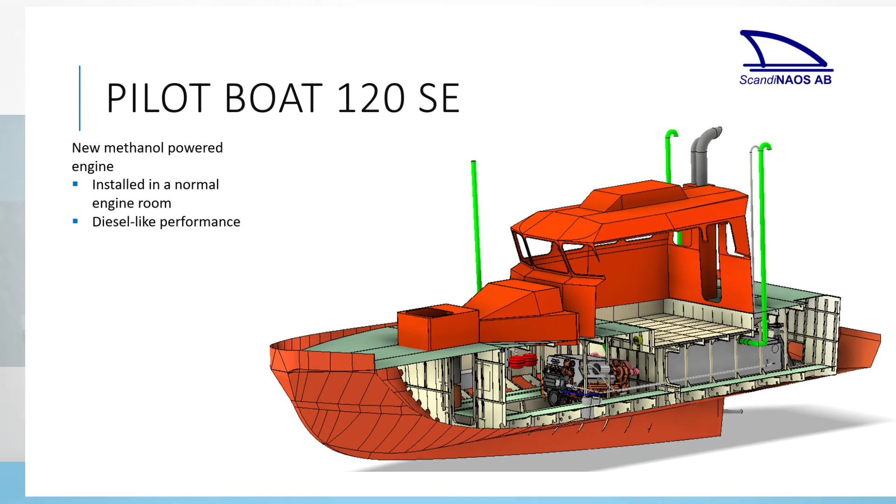There is a new methanol-powered engine installed. As I said before, we have the forepeak, and after the forepeak we have the machinery room. This engine is a methanol-powered engine based on a diesel engine. I will go through it more in detail later, but the physical dimensions of the engine are like a normal diesel engine. The engine is connected to a gearbox, much like or identical to any gearbox or reverse gear installed for a diesel engine. It has the same propeller shaft and the same propeller as it used to have with the previous diesel engine. This means the engine needs to have the same performance or drivability as a diesel, and it has, and that is what it's dimensioned for.

We have double-walled fuel pipes and a double-skin tank, or double-walled tank. If we take a look at the aft of the ship, we can see there is a rudder room, aft of the engine. The gray unit you see there is the fuel tank. The fuel tank is designed from stainless steel, built as a tank inside a tank, with an inner tank and an outer tank, and a small interbarrier space between the two.

The inner tank is filled with methanol, and the outer tank is used as a second safety barrier, because we do not want to have a leakage in the ship. If we have a leakage from the inner tank or from any component connected to it, we can detect it and send an alarm, but it's still contained in the outer tank, so it remains safe to operate the ship.

The same goes for the fuel lines, which are gray in this illustration, running from the fuel tanks up to the engine. Those are double-walled. So if the inner pipe has any leakage or breaks, this would be collected and detected in the interbarrier space. So there's no risk for the people on board or for the safety of the ship.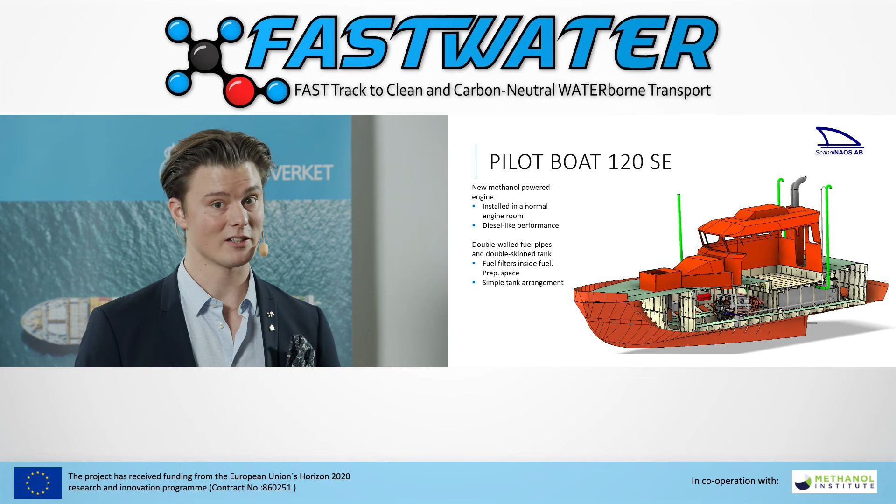We have a leakage alarm for methanol leakage to detect this and give an alarm for it. There is one alarm placed inside the engine room, one alarm placed on top of the engine, and one alarm placed in the interbarrier space between the inner and outer tank.

And for fire safety, as we said earlier, if we have a fire, the flame could be difficult to detect in bright daylight. For this reason, the traditional smoke detectors are also complemented by heat detectors. So we have an extended fire detection system on board.

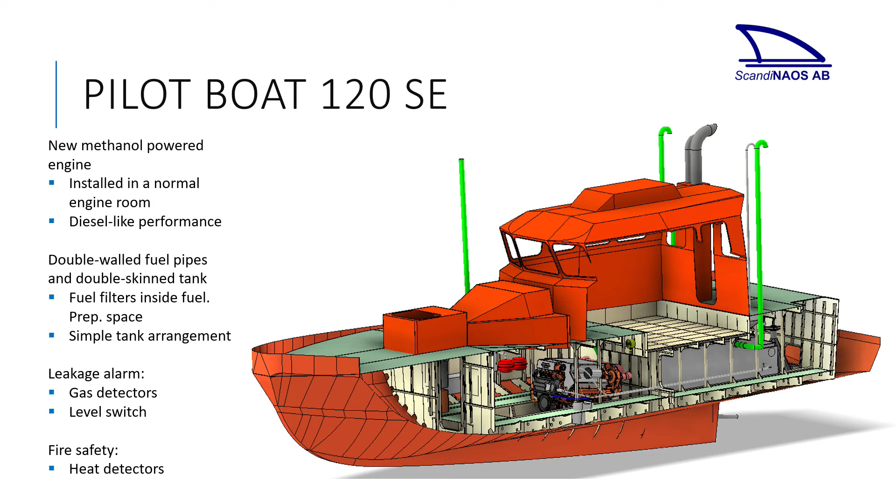The engine is compression ignited, so it utilizes a few tricks to make this technology work. Traditionally, methanol is a fuel that is easier to ignite with a spark plug—you spray it, mix it with air, and then ignite it with a spark plug. But this is not the technology we are using, and there are some reasons for this. One of the most important is engine performance. We want to have the diesel characteristics of the engine, the diesel performance. I will go more into that later.

To make this work, we need to replace a few critical components inside the engine. First, the compression is increased to make the methanol burn easier, or auto-ignite easier. Second, we are using a dedicated methanol fuel system for the fuel injectors and fuel lines on the engine. The methanol is also mixed with 3% of ignition improvers, which makes it behave more like a diesel fuel. I want to highlight that this is not a dual fuel engine—this is a single fuel engine. It's a premix of methanol and the ignition improver, which is bunkered to the tank on board the ship, then transported to the engine and ignited as a single fuel.

And we can still comply with IMO Tier 3. It's very efficient. For certain parts of the operation profile, we can have an efficiency up to 46%. On a cycle value, if you take into consideration the whole propeller curve, low speed, medium speed, and high speed, we are well above 40% cycle efficiency, which we are very proud of.

The pilot boat and the engine are developed in cooperation with Lloyd's Register, so they have taken part all the way through this development process in different types of risk assessments. And in a parallel project to the FASTWATER project, we have also been involved in a process for DNV approval. It's an identical design of the engine for both Lloyd's and DNV here.

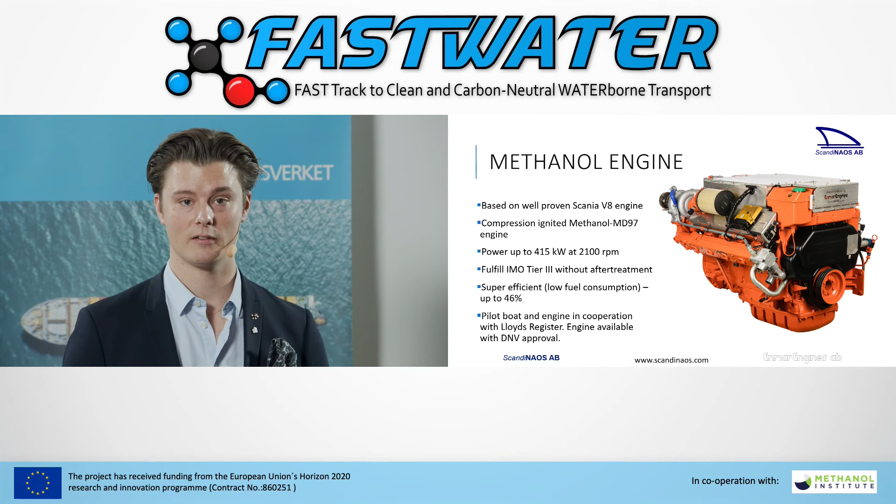These curves tell me, as an engineer, a lot of things. I don't know what they tell you, but I will quickly guide you through them. On the x-axis, we can see the same thing both for the torque and for the power curve—all the way down from 600 RPMs up to 2100 RPMs, or 2000 as it's indicated here.

On the y-axis, we can see on the torque curve that we have the actual torque in Newton meters. On the power curve, we can see that we have the power indicated.

I will keep this short, but it's very important to show that this is the typical characteristic of a diesel engine. We are burning methanol inside a diesel engine and still able to have the same characteristics of the engine. This means the operator will not notice any difference whether they drive a diesel engine or this one.

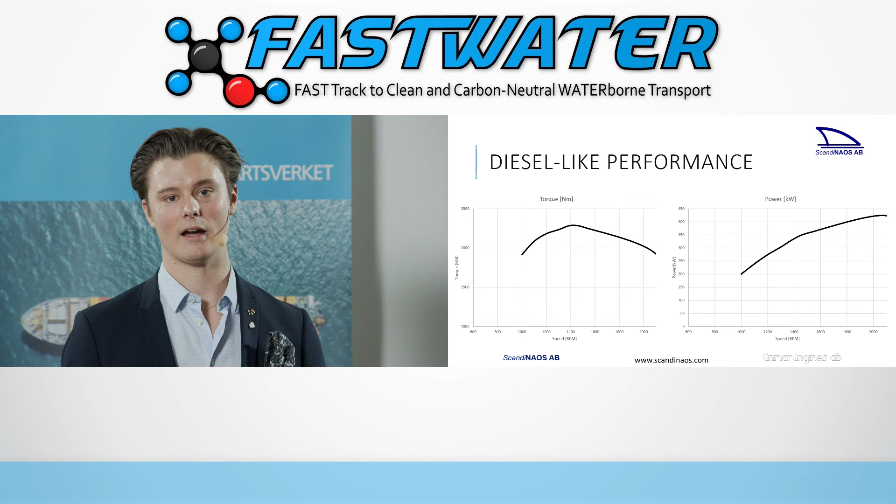That's important for many reasons, but for example, in an installation on board a pilot boat, this is actually a critical safety aspect. Imagine you drive the boat in hard weather up to a larger ship, and you have waves that take you both back and forth. You need to be able to have the immediate torque, the immediate response to get out of this situation. It could be reverse or going sideways, but you always need this amount of low RPM torque from the engine.

Also, another detail here is that to be able to keep the same reverse gear and to keep this size or this big fixed propeller, we need this type of torque to be able to install and propel the boat the way we like.

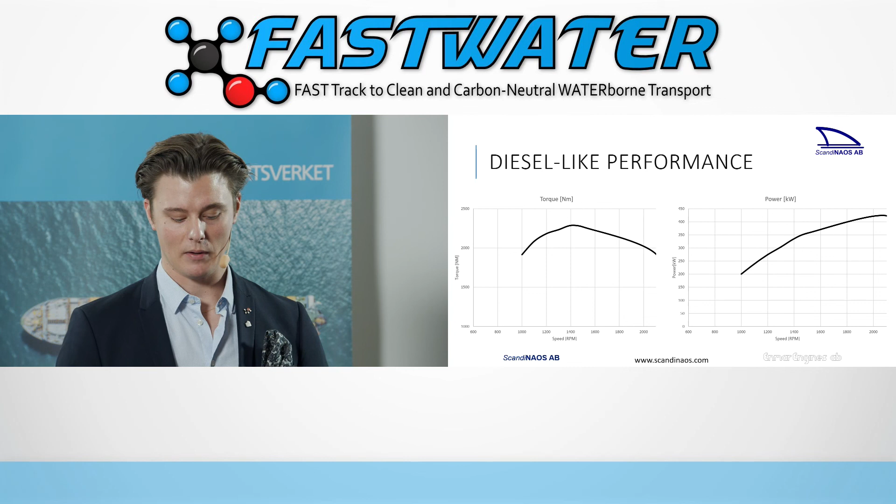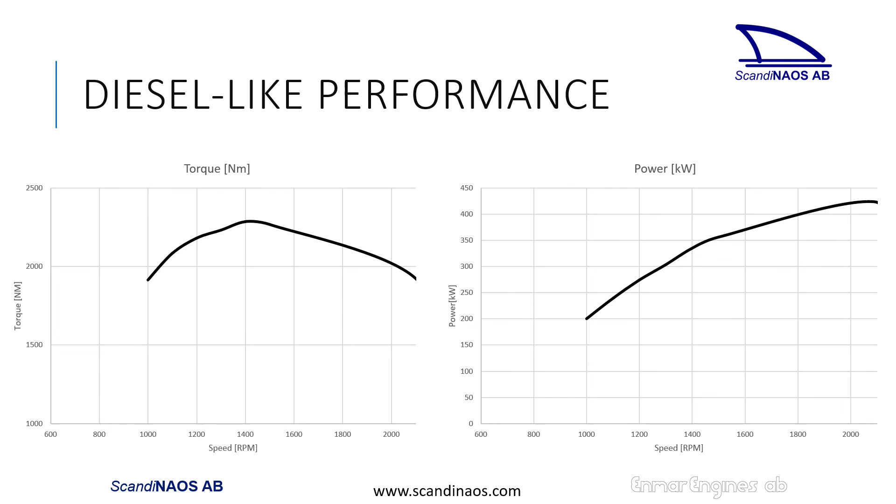Taking a look at the power curve, we can see that in the RPM range between 2000 and up to 2100, it's quite flat, and this is also something we wanted to achieve. This means the propeller matching is easier—we do not have to meet a specific point at the top maximum power. We have some margins to play with, and this is also something we wanted to achieve. So we're very proud of this.

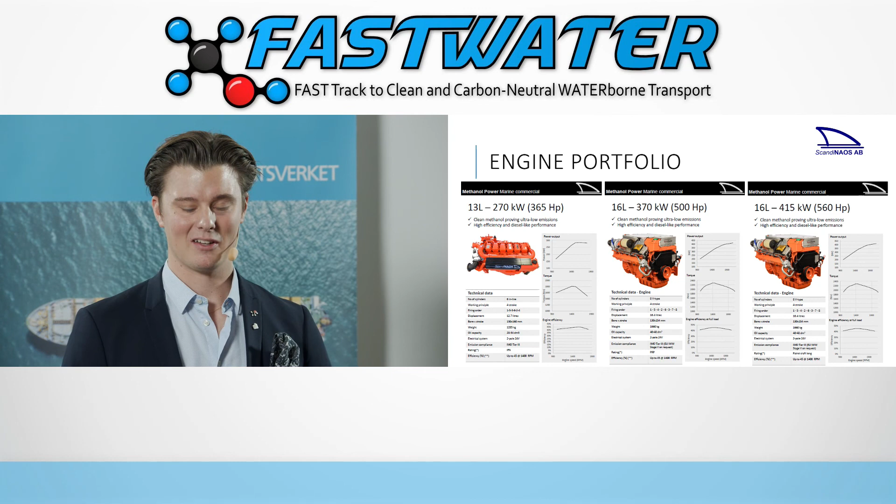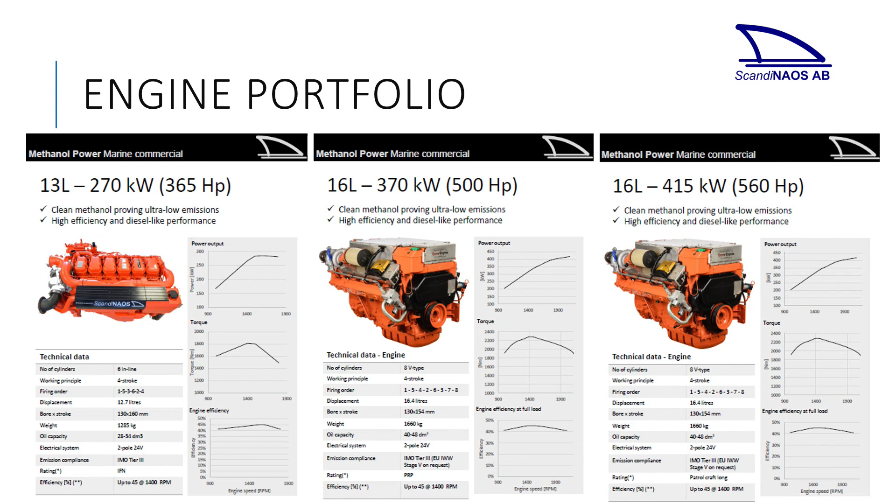ScandiNAOS has a broad engine program. We have developed this engine on board this ship, but we can also develop engines for smaller or larger engines—the 13 liter and also the 16 liter—utilizing the same technology. We have examples of this both from land side as mobile power, and also from the marine side as generator sets, and as in this case, a propulsion engine. Here are some examples of data sheets.

Some conclusions on the ship conversion and the engine: the ship conversion is very simple. It's based on standard components, and this is actually technology both when it comes to the ship and the engine that is available today. This is not rocket science. This is not future technology. We have shown in this project that we have the technology available today.

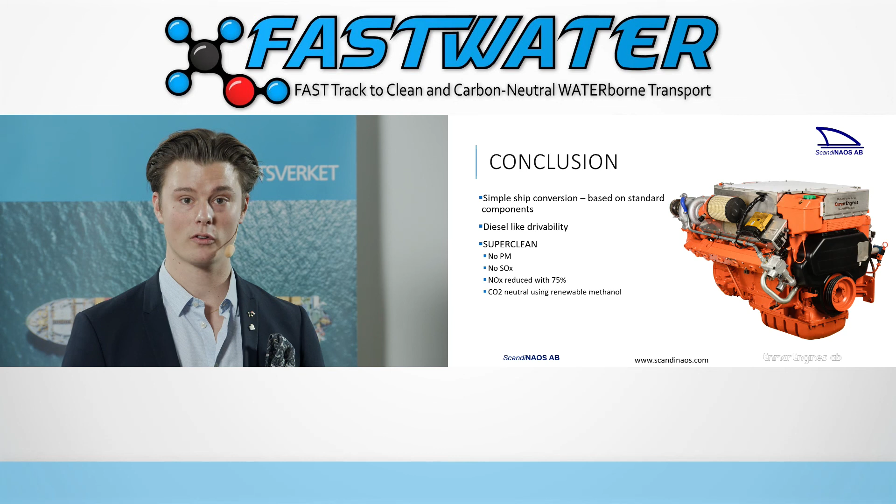The engine has diesel-like drivability, and it's super clean. We have no particulate matters, no SOx. NOx is reduced by 75%, and it's now CO2 neutral using renewable methanol, in this case from Södra.

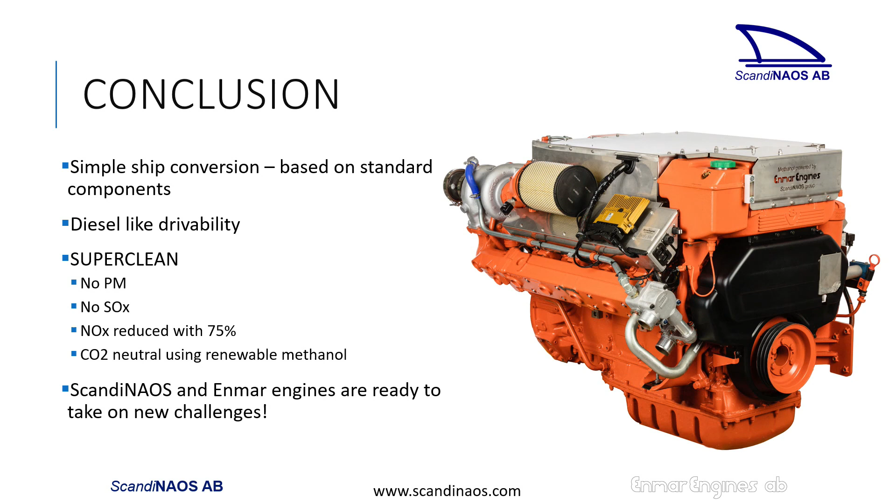ScandiNAOS and Enmar engines are ready to take on new challenges. So thanks from the ScandiNAOS team.